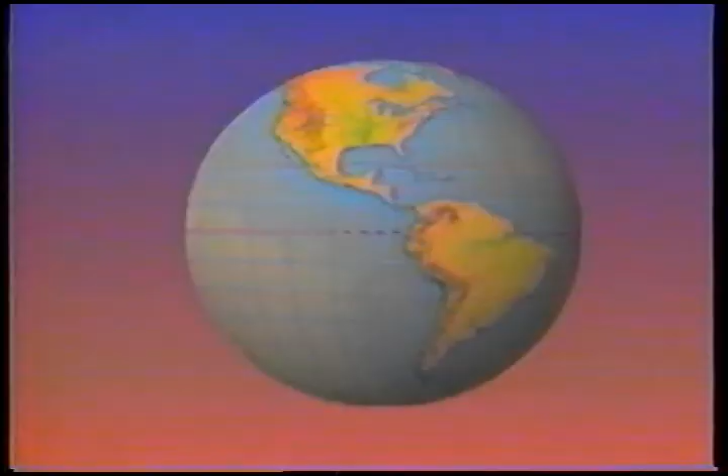The computer allows us to change points of view from the possible to the impossible, and travel in amazingly short periods of time. We can change the world in fantastic ways with computer graphics.

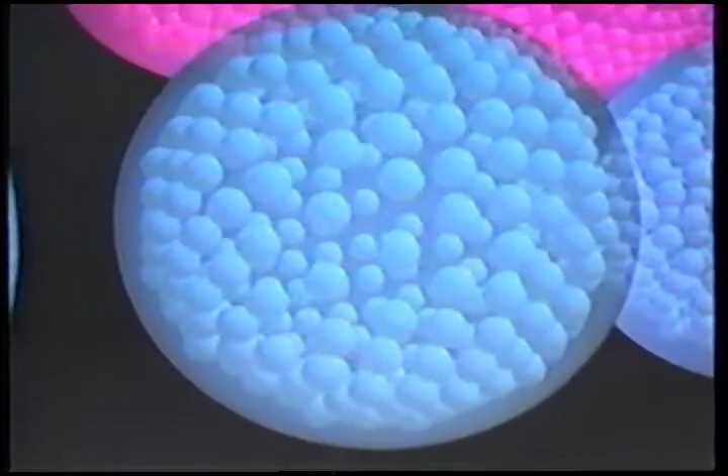Things are transparent, light, floating, or solid, metallic, textured. Glass is created, light sources and colors controlled, and intricate reflections produced. Whole new worlds are created with computer graphics.

Different styles of painting can be accomplished almost like painting on a canvas. The Quantel paint box is easy for the artist to use. The computer has built-in geometric shapes available, such as squares, circles, and lines. The on-screen menu at the bottom is used to command the computer to select different operations, including magnifying the area to be worked on.

A wide variety of type styles are available. Any image can be scanned into the computer and changed or retouched. The use of computer graphics to change reality brings us some interesting questions.

Designer Donna Cohen: There are computers where the resolution is so high that you can never tell that it was ever touched by anything, which raises the whole question of photography as evidence of anything. I don't even think people are aware of how much computer graphics is used today. There's just a whole question now of what is real.

Create a new reality by adding an erupting volcano to the San Francisco skyline, or remove the World Trade Center from the New York City skyline.

The artist saves and retrieves pictures which can be altered or recalled at any time from the computer library. The artist cuts and pastes elements together or shrinks images to any size. Create motion by combining a series of still images.

A large number of separate elements were created on the Quantel paint box and then combined into one single finished piece.

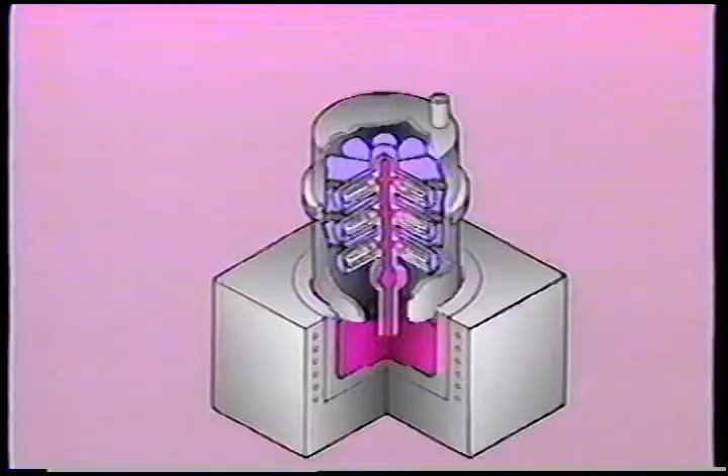Computer graphics is big business, with over $7 billion spent a year in the United States alone. The majority of the computer graphics industry is concentrated in computer-aided design, or CAD. Other major uses are electronic design, business graphics, architecture, and mapping.

The images most people have seen on TV are the smallest part of the business, but have the most public awareness. International audiences have become very familiar with the graphics, logos, and commercials shown nightly on television.

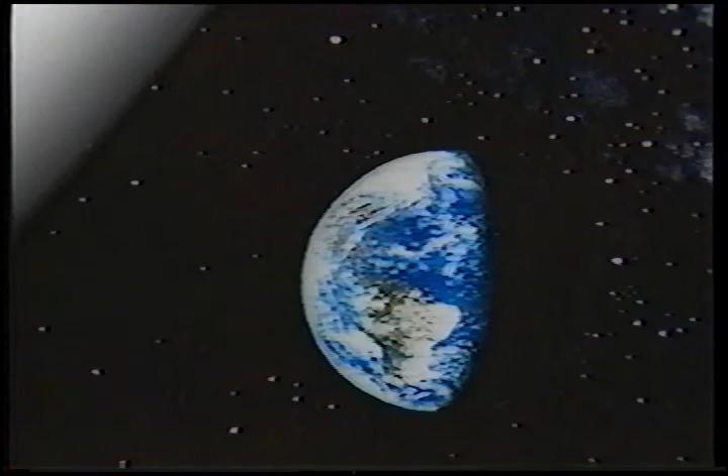Steven Spielberg wanted 37 objects to fly by in only 45 seconds. That's usually the number of objects used in 3 or 4 30-second TV commercials.

Director Randy Roberts: We had 37 objects, even though they flew by quickly, each was on about 4 seconds, and each one had to be rendered fully.

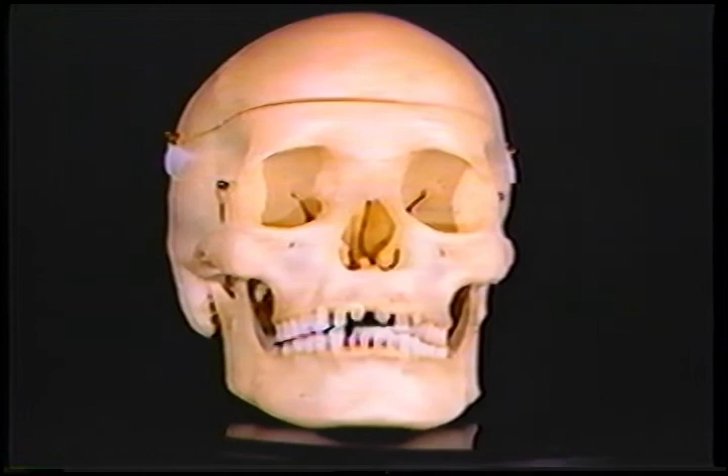Producer Robert Abel: Every object in Amazing Stories has textures and highlights. Like the skull, you can't tell the difference between the real skull and the one we've created with raster imagery. Even when you don't see all the details, you can sense them.

Just look at this book for a minute. The inside is real typography of Charles Dickens' Christmas Carol. The binding is real alligator leather.

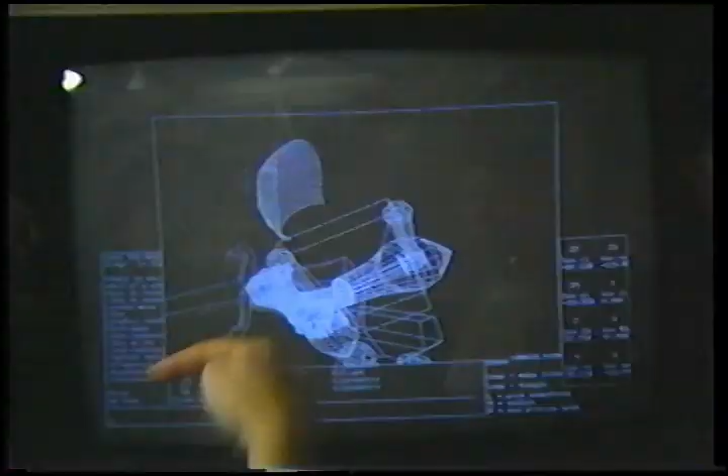The knight in Amazing Stories had to move in a lifelike fashion. The knight's elbows and wrists had to move along with his head and torso. A live-action swordsman was filmed and turned into the wireframe model, which was used to produce the finished computer-animated knight.

Developing a realistic-looking stone head image was another problem. This was solved by making a head and dividing it into segments whose coordinates were fed into the computer using a digitizer. This rough data was then enhanced point by point on the Gould computer system.

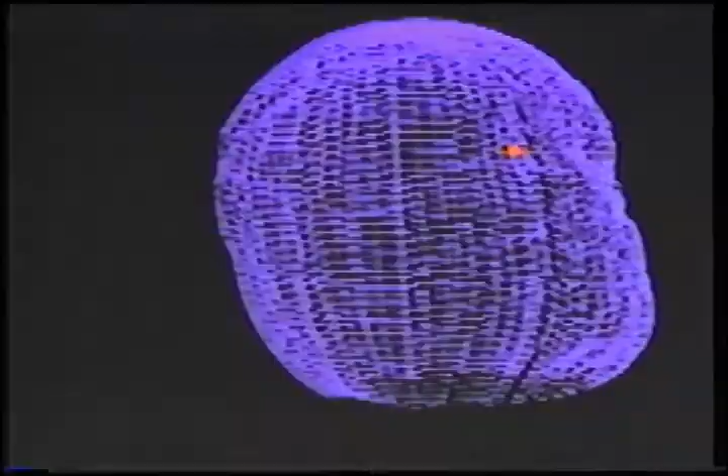Using photographs of a pigeon in flight as a reference, various wing positions were picked and input into the computer. The birds flew perfectly the first time.

A massive amount of information was required to create the images on the Gould computers. We had people here 24 hours a day. It got insane. There were people sleeping here towards the end. We'd have shifts of people coming in the morning that wouldn't see the people that were working in the night.

Even when you don't see all the details, you can sense them. And that's what makes great computer graphics.

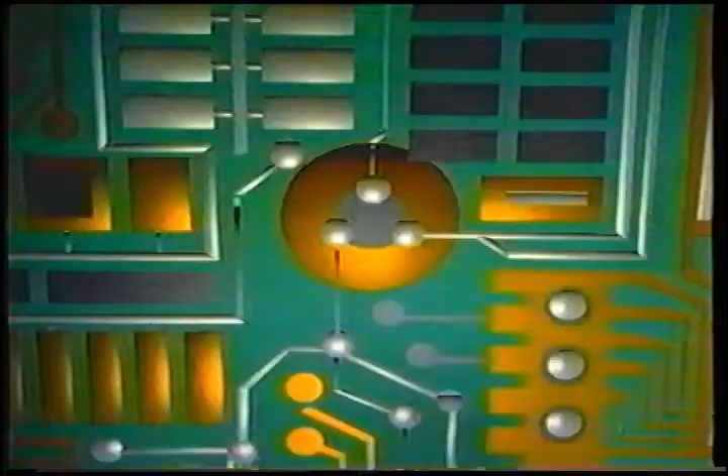Nowhere else do people see as much sophisticated computer graphics as in broadcast sports.

Carl Rosendahl: With every job, ideally what you want to do is play with things that you've never played with before, do something that you haven't done.

Put yourself on the line where you have to be creative and imaginative to come up with either a new technique, a new look, a new way of doing things, something that makes that job interesting and exciting.

KRON-TV in San Francisco uses the Aurora Paint system and its weather graphics package to quickly get the condition or situation across to viewers graphically.

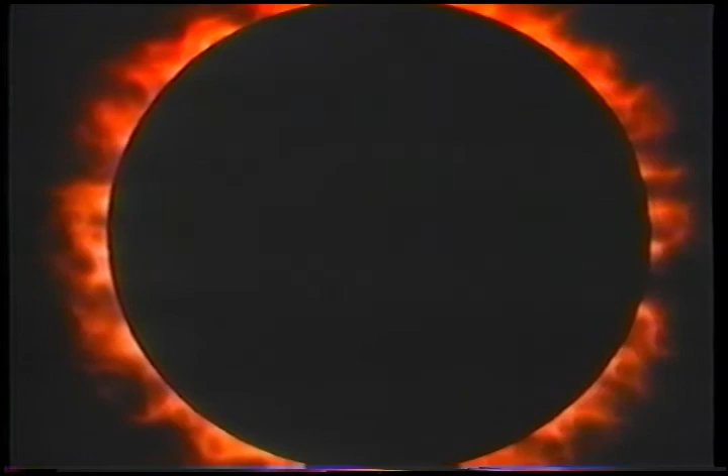Color and lighting is a very important factor, particularly with graphics, where you're trying to get across a look and a feeling in 10 seconds.

You can pick some perfect blue for your object, but you don't know what color it's really going to be until you light it. If you light it with only red lights, it's going to look purple.

Using this wireframe ball, the number and placement of light sources can be chosen. With a surface now added, the intensity, light color, and texture is specified.

This image can be placed or mapped onto the ball as a reflection. The same image can then be used as a background behind the finished ball.

This still life is created using the Alias 3D design workstation. The animator works on modeling a wireframe apple, which is given several sides. The completed 3D model is rotated.

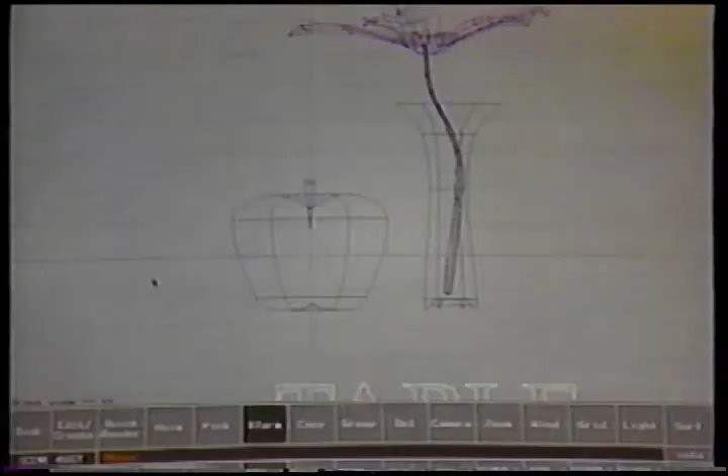A vase is added and the two models are seen together in perspective. Text is added and extruded to make it three-dimensional and then positioned with the other models.

Color is added to the models, and the final image manipulated for different looks and styles by changing the textures, lights, and levels of transparency and colors.

Using the Symbolics 3D system, the animator begins to model objects and choreograph motion using wireframes instead of the fully colored object. Wireframe images are collections of straight lines which can be displayed and moved much faster by the animator to test motion before the final piece is computed.

Using the Wavefront technology system, the Showtime text or logo was formed from individual 3D letters.

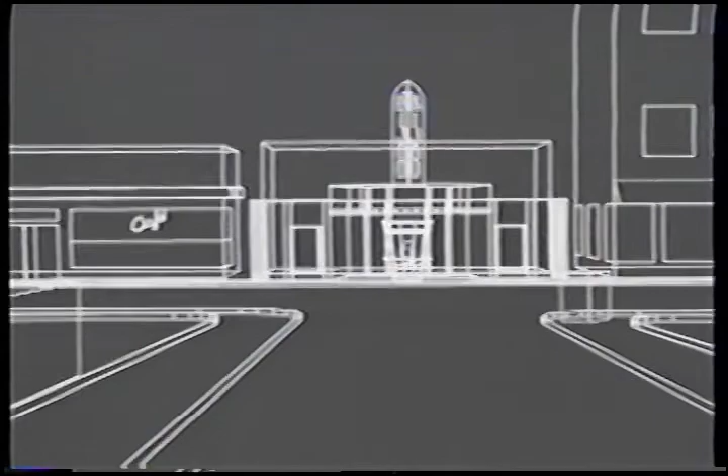This wireframe city street scene was built on the Bosch computer system. While the bus pulls away, we move closer to the movie marquee with a traveling point of view. In this low-resolution color test of the same scene, objects now have surfaces and color, but they have a rough appearance and little detail. In the final version, notice that the bus has been given headlights, there are stars in the sky, and lampposts have been added to the town square.

Also, with a moving point of view, we fly through this complicated landscape of moving images for Bravo. Notice that other effects have been added in the finished piece over the content of the original wireframe test.

With the advent of three-dimensional computer animation, different looks and styles have evolved.

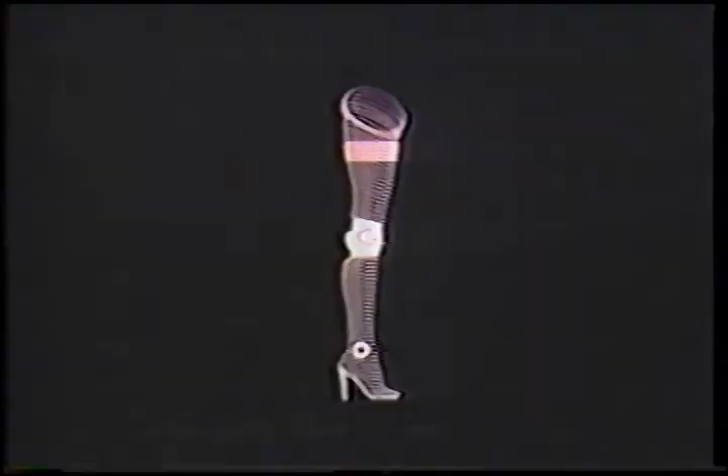This entire image really never existed outside the computer itself. The biggest unknown was making her move and bringing her to life. Randy invented a technique he called brute force animation. We filmed a live model and programmed her choreographed movements into the computer. The computer tracked reference points painted on her body and created a stick figure animation, which we call a vector graphic.

A vector graphic, or wireframe model, was created on the computer and animated with the face of the real model converted into an astonishing simulation of real life.

The robot, her movements, the details, each reflection, the magic she does with the food, getting all of that into an environment and then adding Jupiter into the picture window. Well, that's millions of bits of information that the computer has to chew through.

Those millions of bits of information took 3 computers used round the clock for a month to process the images for the final commercial. Perfect fluidity of human motion is transformed by the animator with the computer into the captivating images of the future.

With advertisers locked into an increasing battle for the attention of TV viewers, ad agencies have discovered the alluring power of computer-generated TV commercials.

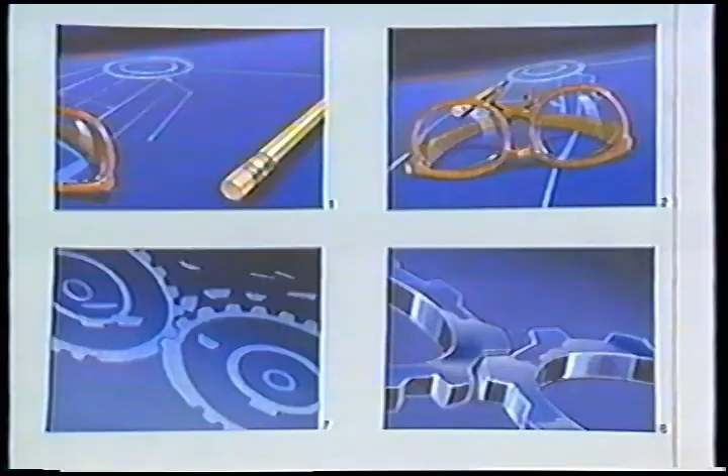An artist at Cranston/Csuri Productions in Ohio prepares a storyboard for a TV commercial showing each visual scene in the order it will appear in the finished commercial.

The animator uses a real pair of glasses as a model for a drawing on the computer.

The drawing is traced into the computer using a mouse. The computer produces a three-dimensional model from the drawing.

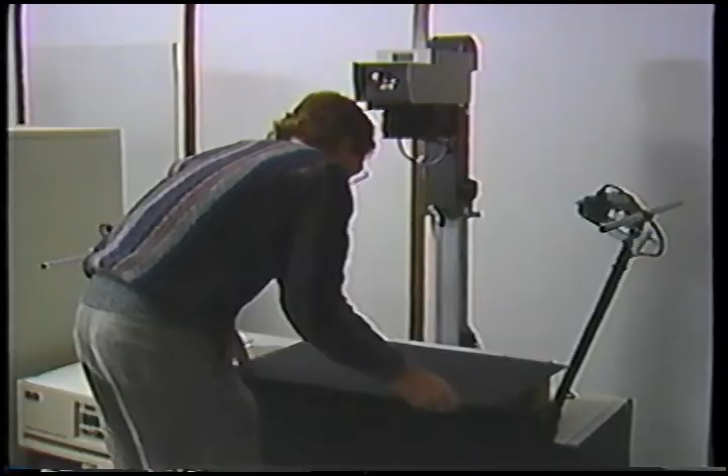The model is easily moved in its wireframe form. Using video camera input, real pictures of clouds are placed or mapped onto models of the gears. Several completed still frames are made to check the color and lighting. The animator tests a rough version for motion before the final commercial is recorded onto either videotape or film.

American and international businesses are finding computer graphics an important and vital tool in their offices.

Bill Kovacs: I think in 5 years, any self-respecting departmental head, when he goes in to make a presentation to the board at a Fortune 500 company, will be embarrassed if he doesn't have moving graphics to show.

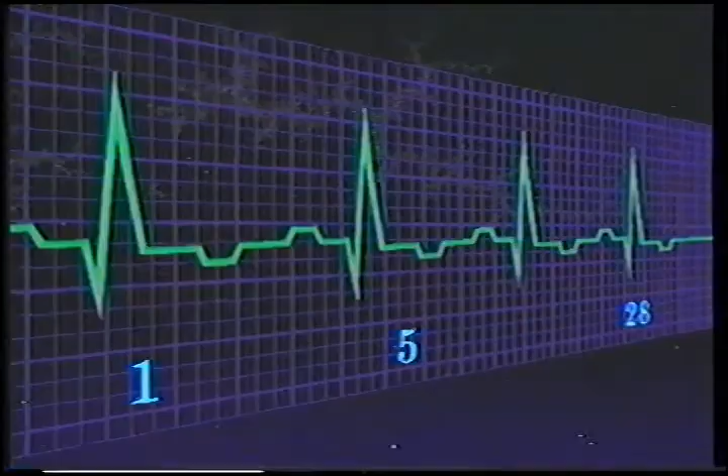Corporate communications are rapidly becoming dependent on computer graphics. Historically, business graphics have evolved from the needs of companies to display numerical data. Industry uses computer graphics to aid in sales and training. With the medium of 3D graphics, it became possible to break out of flat pie charts and bar graphs into creative spatial representations.

The computer has proven to be an invaluable tool in the design of products. For this hairdryer, varying amounts of transparencies were assigned, allowing the industrial designer to study how components work together and look in finished form while they're still being developed.

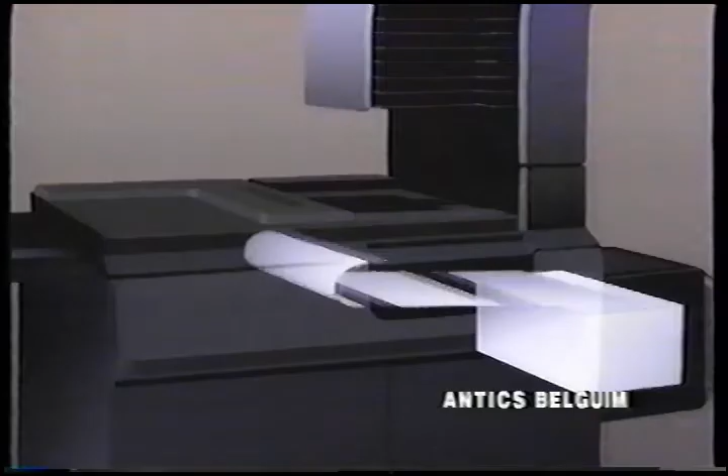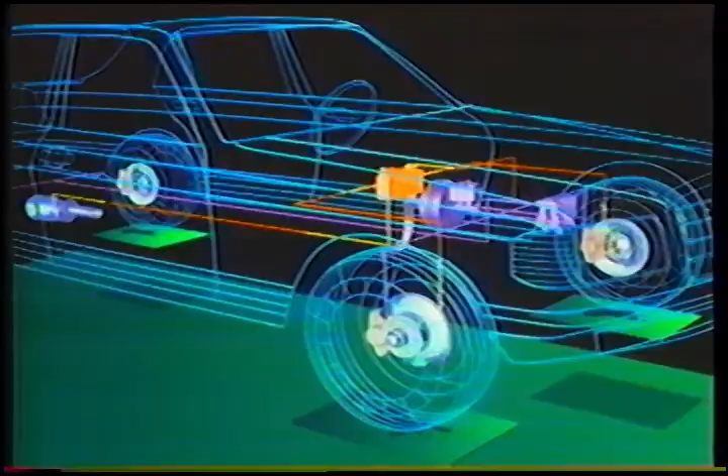Nowhere is it more important than in the automotive industry. Before computer graphics tools were available, a car designer had to build models of clay, wood, and plastic. With today's computer-aided design, or CAD, the designer is free to try out many more possibilities in a short period of time. This gives manufacturers the leading edge. Instead of redesigning models with clay, they can be changed quickly with the computer.

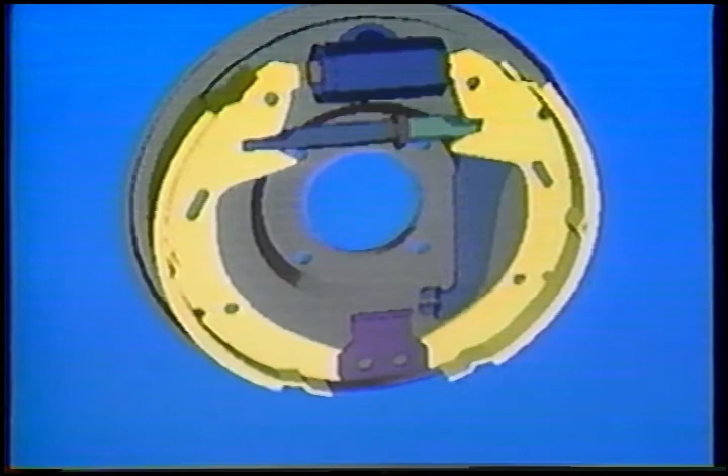Not only can the designer visualize the part, but the latest systems can test the material's properties and interaction with the rest of the automobile. With design accomplished, parts are automatically built and computer-controlled robots work on auto assembly. Animated computer simulations are used to develop and evaluate handling characteristics of vehicles and visually demonstrate their performance.

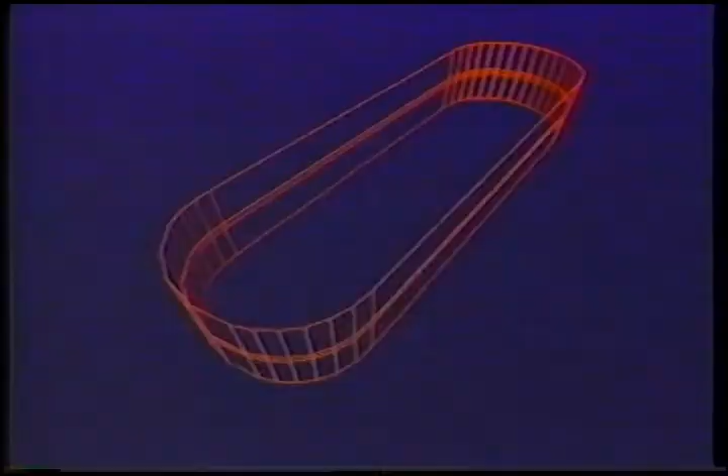In architecture, buildings are designed and previewed from all angles and sides through the use of computer graphics. Bridges and towers are examined as well as buildings.

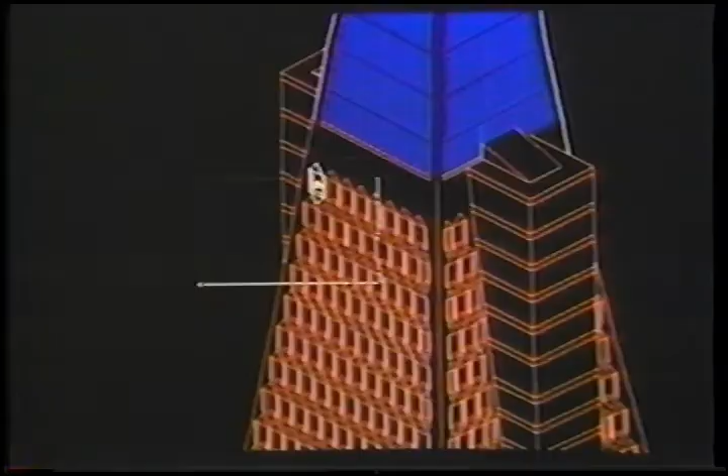Using AutoCAD, the computer gives us a closer and closer view of San Francisco's Transamerica Pyramid, until we can actually work on designing the specific interior of one person's office. Each of the possible design elements in this floor plan are explored and changed quickly.

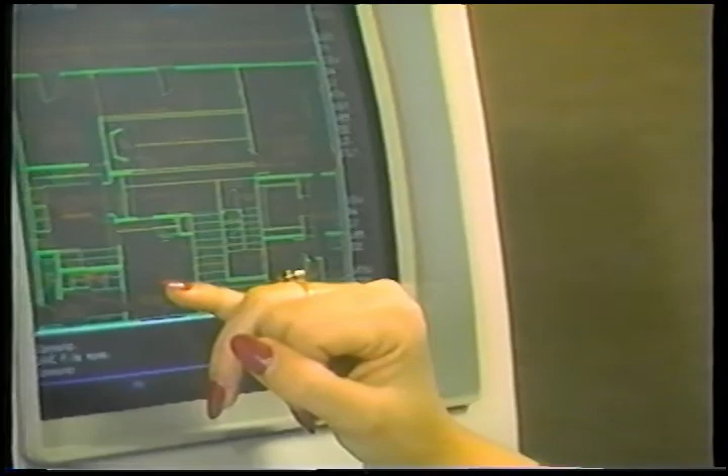Designers study and share information with each other while their computers communicate on a common design plan. This courtyard area has just been given new parking spaces.

A solid model of a downtown city block is built, and the viewer is free to move around it or over it. Finally, a complete simulation of what the finished building will look like, inside and out, is made on the computer.

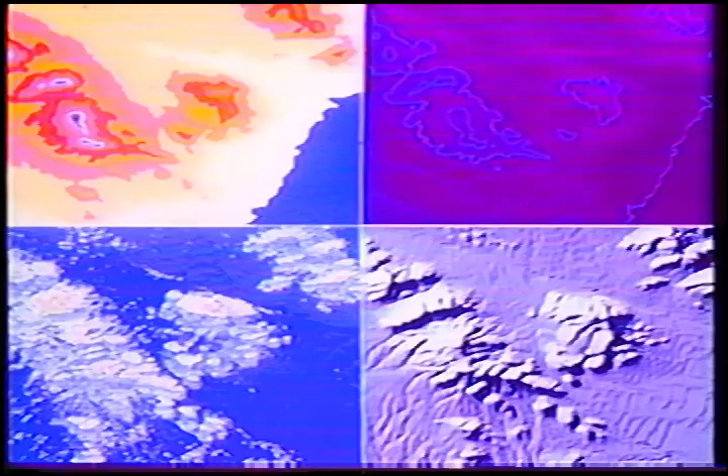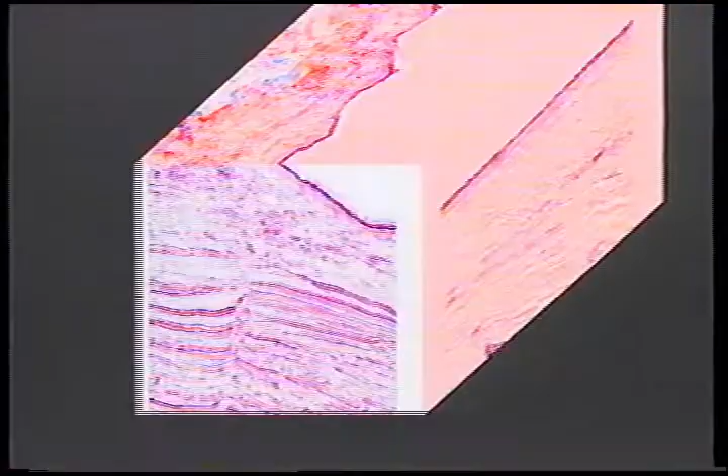Worldwide information is easily understood when displayed graphically using the computer. Geologists convert flat 2D information into three-dimensional landforms for seismic studies, mapping, and topological engineering. The high-speed Pixar computer is used to build this 3D terrain model and for geophysical analysis of the underground salt dome to search for oil.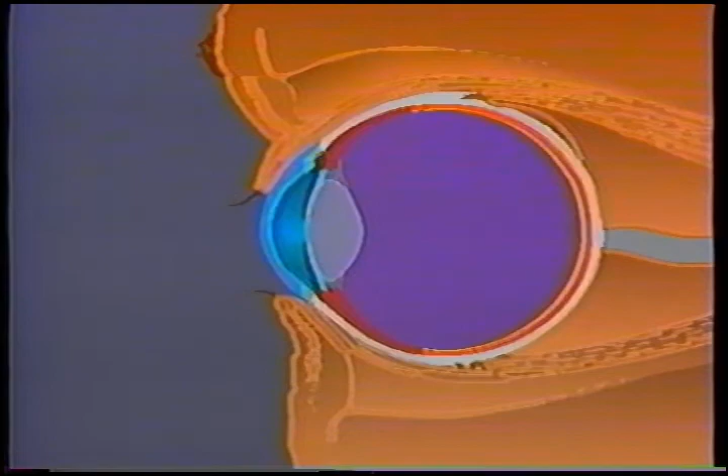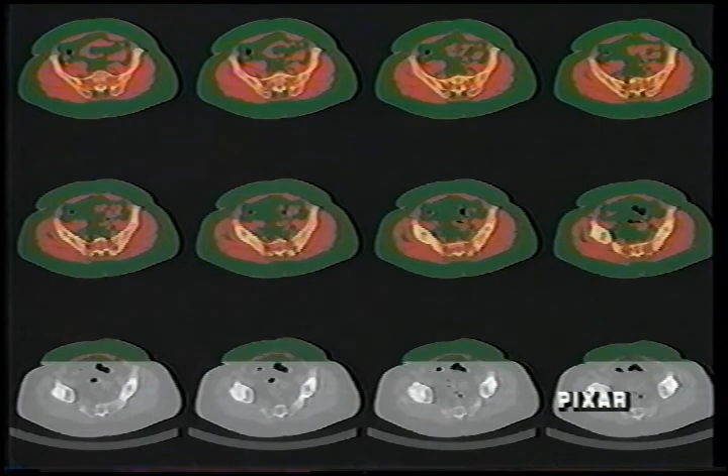Computer graphics are used to reveal the world inside the human body. These multiple black and white CAT scan views of a human pelvic region were input into the Pixar computer, which assigned different colors to the bones and soft tissues. Different views were calculated and then displayed using 3D animation.

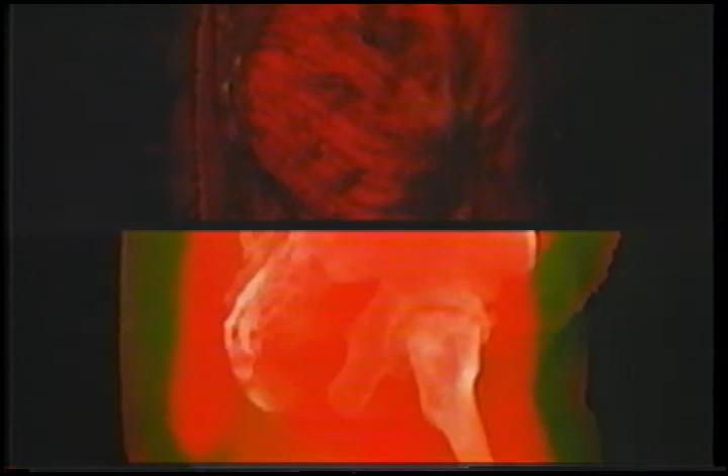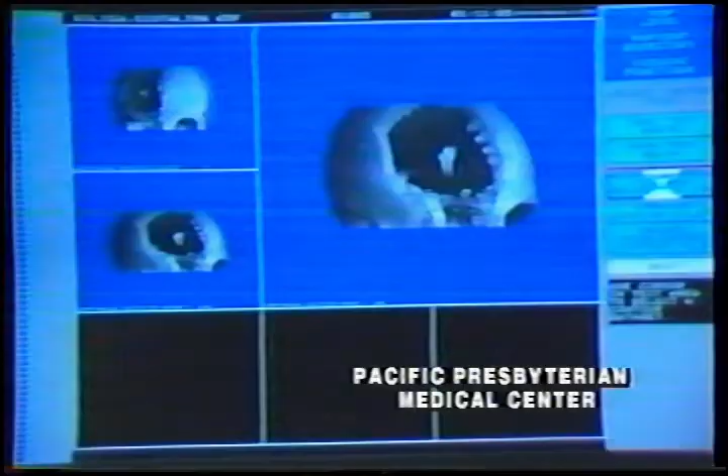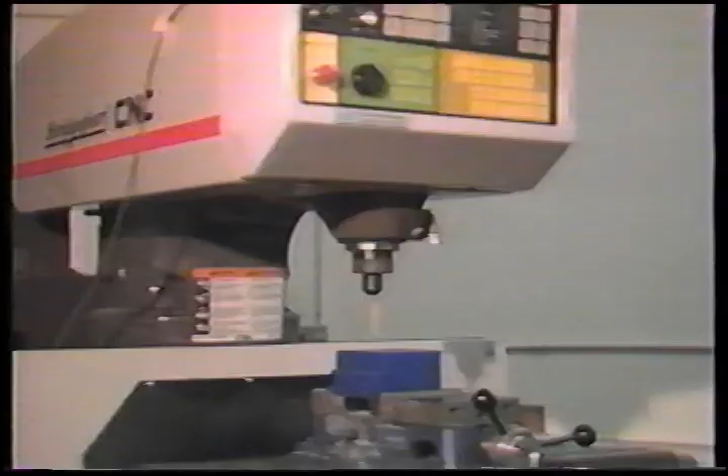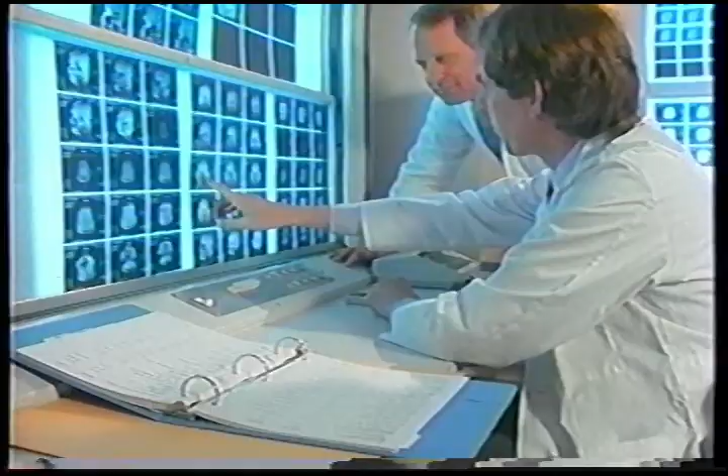At Pacific Presbyterian Medical Center in San Francisco, computer graphics is used in reconstructive surgery to provide 3D views. The operation is actually planned using the computer, and a visual simulation of the surgical outcome is previewed. The computer information is used to automatically machine molds for production of custom bone implants. The result is greater surgical accuracy, better preoperative planning, and shorter and safer surgery.

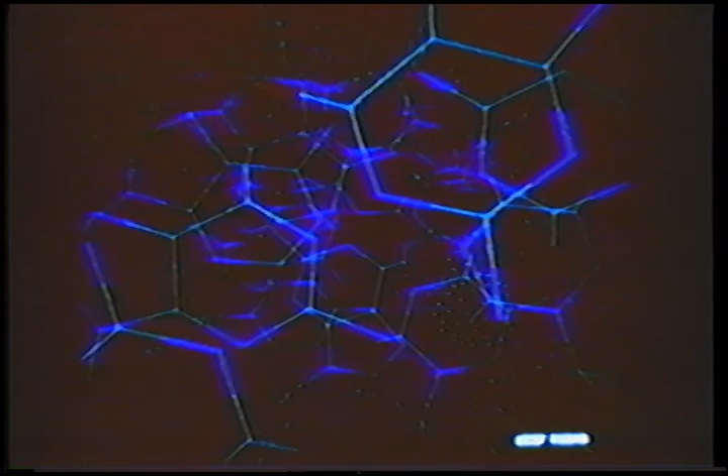In science, computer graphics allows the viewer to travel far inside the human body, to study the smallest details, to simulate the invisible so that we can see it. Faculty and students at the University of North Carolina are able to interactively view this simulated enzyme molecule using an Evans and Sutherland computer system.

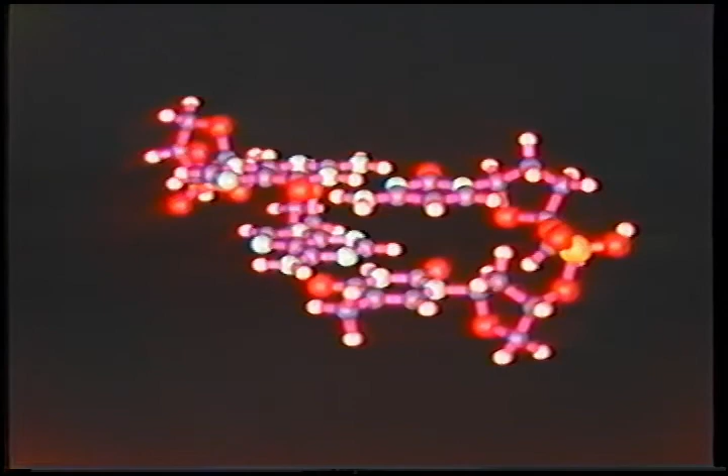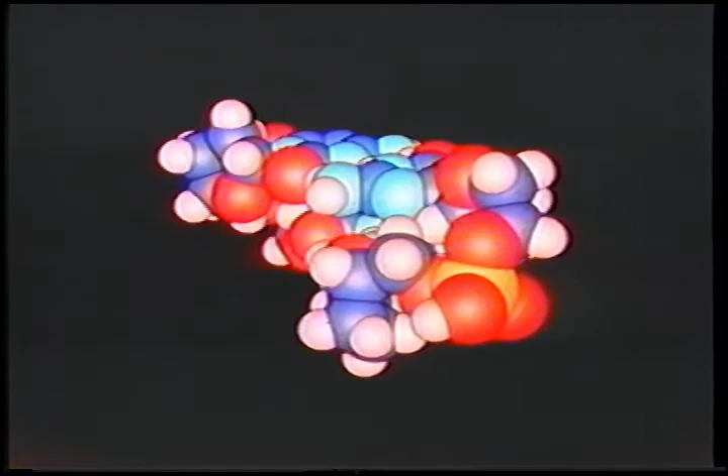Nelson Max has spent years studying and animating how DNA, the building blocks of life, work. Computer representations that can show those surfaces are useful for chemists who are studying how molecules interact, or how DNA can deform to open up to allow a drug to go inside. What I show in the animation is the DNA actually twists open to make a hole, and the drug then comes in and slides into the hole.

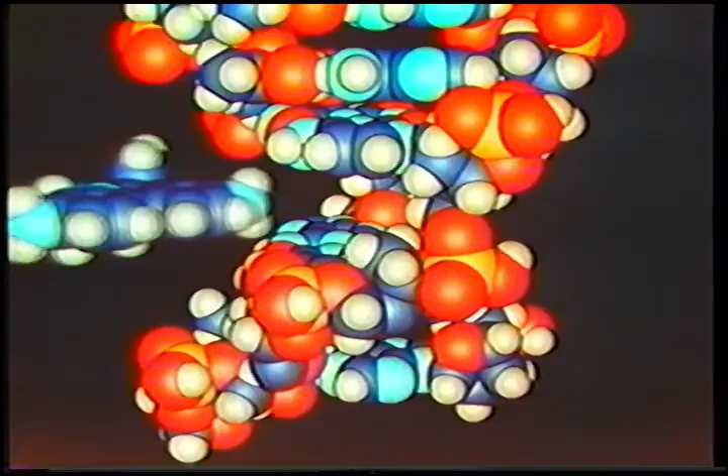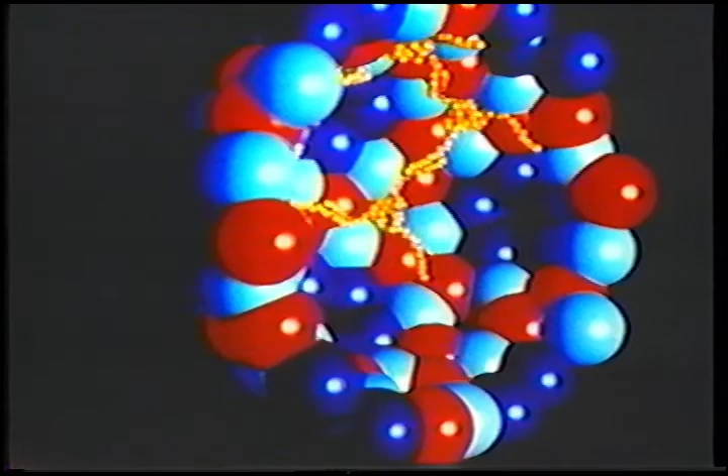A tomato plant virus is studied, with the protein in yellow linking 3 subunits of the molecule together. A more complete view shows the yellow protein linking many molecular subunits.

The simulation of flight for training pilots was one of the first and largest practical uses of computer graphics. A simulation system comes very close to matching the thrill of flying.

Flight simulation systems have become so advanced that the images they produce seem real. With the Evans and Sutherland real-time system, these images are being used interactively, with the operator able to control how the plane moves. The concept is similar to playing a fast video arcade game, but here the images are finely detailed. A complete flight simulation system can cost over $8 million to buy.

Harry Marks: The ultimate system is real-time. A flight simulator is a very expensive piece of equipment. They're working in real time at a stunning level of realism.

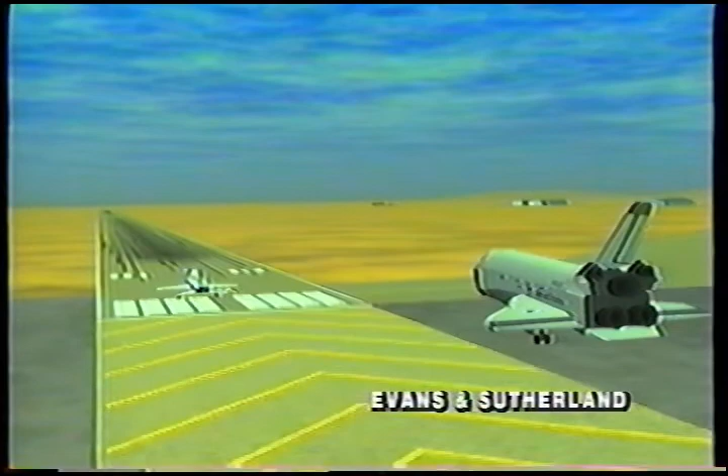This simulated space shuttle landing gives pilots the opportunity to practice delicate and vital maneuvers as the shuttle responds instantly to every command during the landing. Stanford University uses the Bosch computer system to simulate the shuttle docking with a space station and life inside the station.

The building of a working lunar colony is visualized, and the completed colony has visitors in this projection of the future.

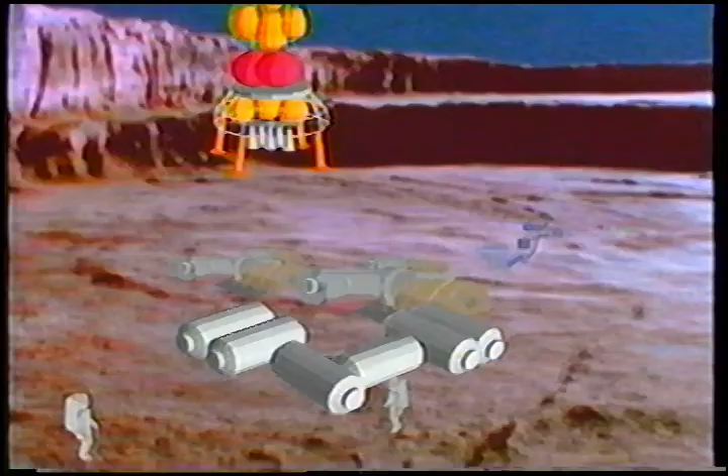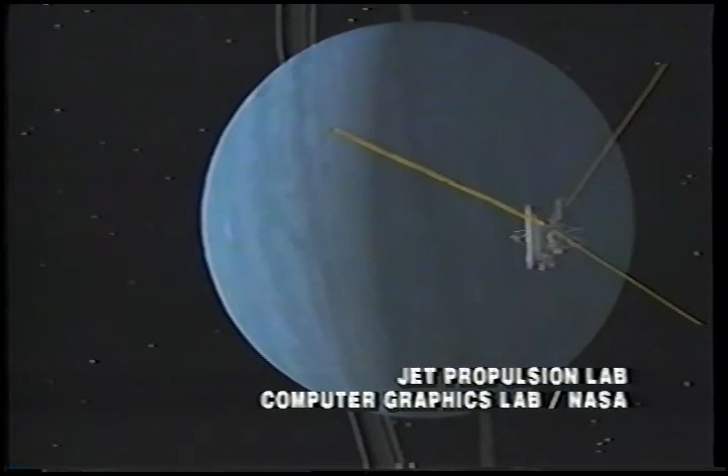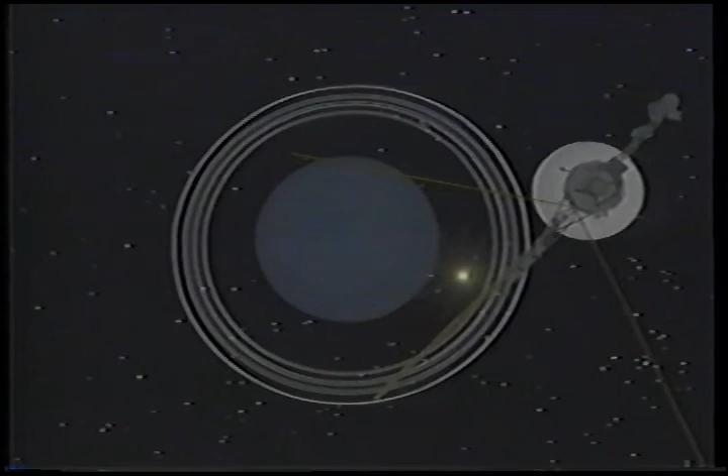Back in 1781, the first planet to be discovered by telescope was sighted. A little over 200 years later, in 1986, that planet, Uranus, was visited by the Voyager 2 space probe, as we see here in a computer simulation made by Dr. James Blinn of the Jet Propulsion Laboratory in California. Computer images of Uranus and its rings are both visually stunning and scientifically correct.

The computer simulates the anticipated visit to Neptune by Voyager 2 in 1989. The use of computer animation is not limited to peaceful scientific explorations of space, as these British simulations of a nuclear war above Earth show.

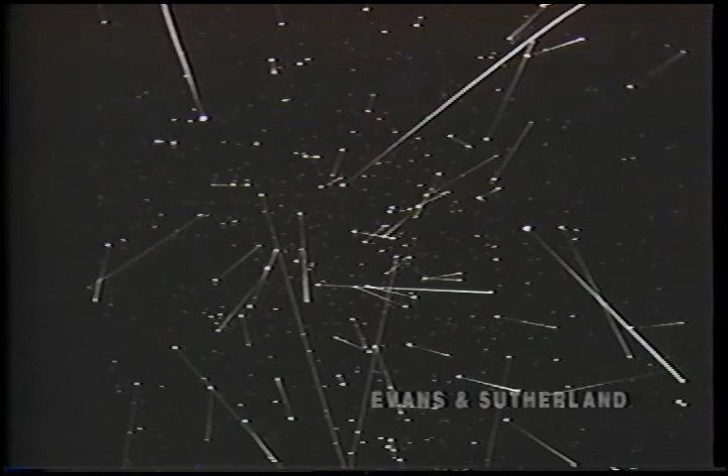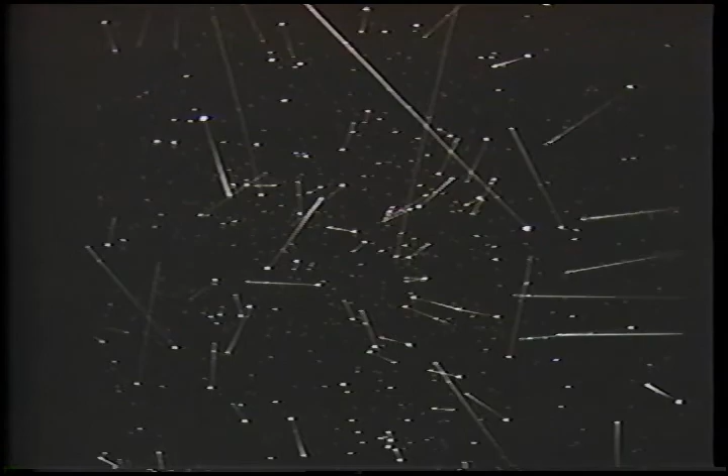To be able to look into the future using computer graphics and see where the stars will be years from now and where they have been in the distant past provides wondrous new information. Computer graphics plays an ever-expanding role in understanding the universe.

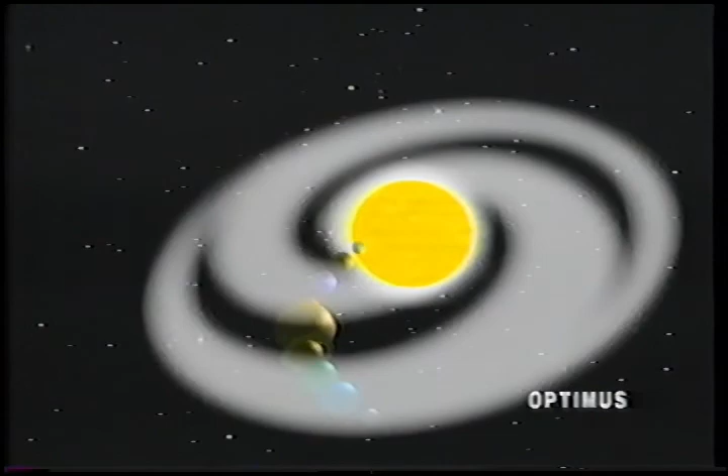The birth of our solar system is simulated here on the computer using 3D animation to visualize the process of creation billions of years ago.

The award-winning film, Quest: A Long Ray's Journey into Light, was made by some of the staff at Apollo Computer in Massachusetts during off hours. 50,000 hours of computing time and over 100 computers were used to complete this complex journey into this fantasy world.

Highly reflective surfaces are created here in the computer using a process called ray tracing, in which an imaginary beam of light is traced as it would bounce from a light source to an object to the viewer's eye. This time-consuming process creates highly detailed and spectacular images.

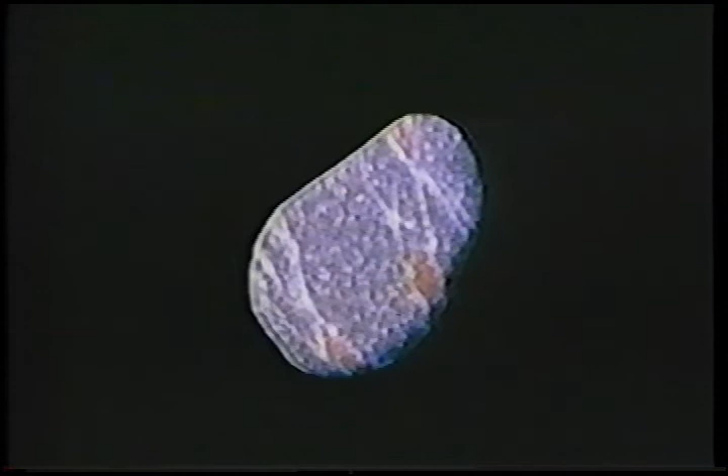The ability to alter texture, along with lighting and color, provides an endless and beautiful variety of forms. The jug is completely simulated. The designer creates light and reflections with the computer the way we see it with our own eyes.

Using a Cray supercomputer, Digital Productions in Los Angeles shows their ability to completely change almost any object or texture into another.

Animation designer Jeff Kleiser: The reason I think reality is of interest to people who are writing computer programs for simulating things is that once you can suspend the viewer's disbelief in looking at a scene or an object, you can then do something with that object which is not possible in reality. That's where the fun is for me — where you're not sure if you're seeing a real object or a synthesized object, but the payoff is when the synthesized object can behave in an unreal way or do something that would not be feasible in reality.

Computer graphics combines man and machine with the ability to create new awareness and new realities. Consultant Louise Ledeen: There are things you can do with computer graphics that you've never been able to do with any other medium. It's being able to create life. The computer has now flowered into a powerful tool for creative minds.

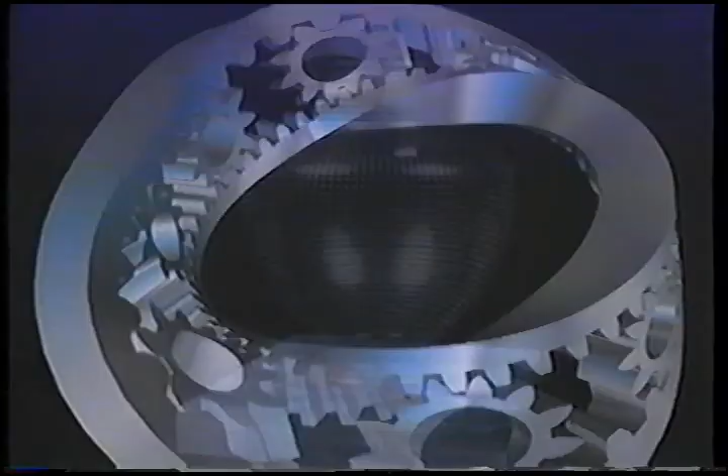The art form known as landscape takes on new meaning when computer animation is applied to the form.

Painting with computers became possible when artists were introduced to the new technology. Donna Cohen: I view the computer as a tool, much the way a painter views a paintbrush, a writer uses a pen. It's just another tool which enables us to bring a lot more elements together.

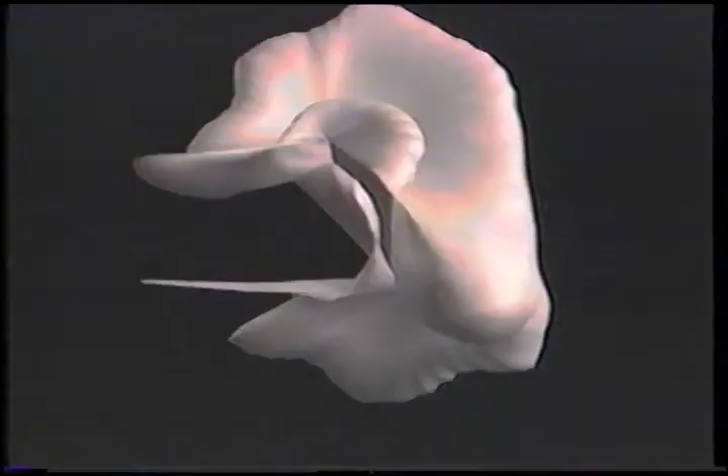Jeff Kleiser: The impetus behind using computer graphics is to get a new look, to do something that hasn't been done before. Louise Ledeen: Artists are the people in the culture who have historically made the most visually significant statements about their times, and if anyone can find the beauty in a technology, it's an artist. I think that's been proven throughout history in any form of industrial art, from weaving to pottery and now into this realm. So I think people take that responsibility very much to heart when they create work. Just like there are a lot of different styles in painting, there are many different styles in computer art.

Nelson Max talks about Yoichiro Kawaguchi. When he was young, his interest was as a naturalist. He loved birds and sea creatures and insects, and spent a lot of his growing up looking at natural life forms. Then when he got into computer graphics, his images were inspired by these natural life forms. He ended up teaching himself computer graphics before there were systems that he could use.

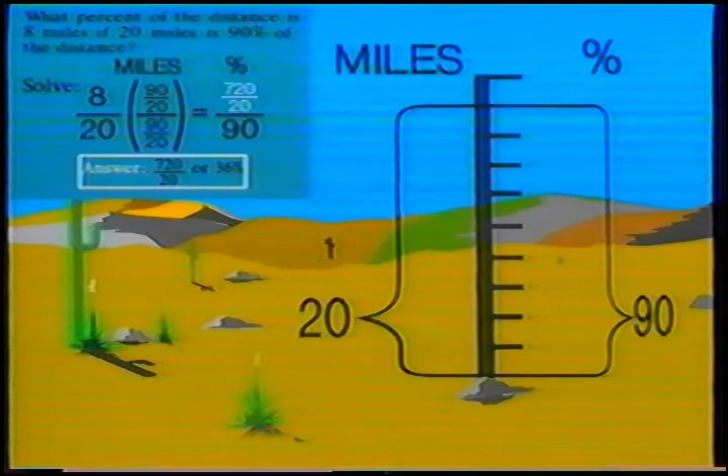Let's make a picture of the problem. We know that 20 miles is 90% of the distance. We have to find out what percent 8 miles is.

The Teleguide is an interactive computer display terminal which provides free information on a wide variety of topics, and is found in cities in the western U.S., Mexico, and Japan.

Aurora President Dick Shoup: Computer graphics certainly has the potential to enable communication between people on many levels to be a lot better, to be a lot easier, and a lot clearer.

Computers have become easier to use, enabling inexpensive home computers to produce graphics. Painting with a computer is fun.

Computers and music are natural together, both for learning to play music and as a professional tool for musicians. Combine home computer graphics and music, and some surprisingly complex ideas can be communicated easily, such as in this cartoon, Lone Breaker, promoting world peace.

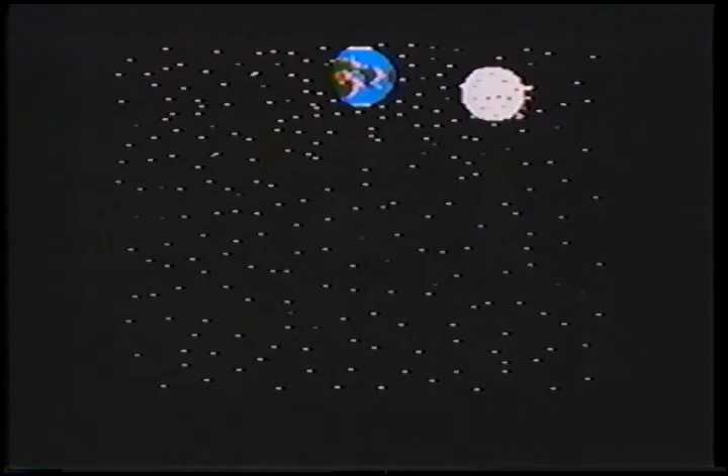Students at Sheridan College in Canada produced this piece under the direction of Robin King.

Oh, this will be fun. Come on inside. Here, how about going on a nice little ride?

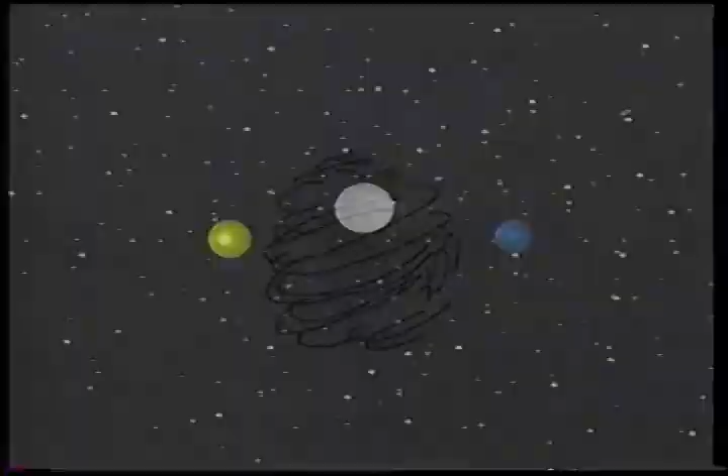Andre and Wally B, made by Pixar for Lucasfilm, illustrates the ability of designers and animators to completely create a short story cartoon using 3D computer animation.